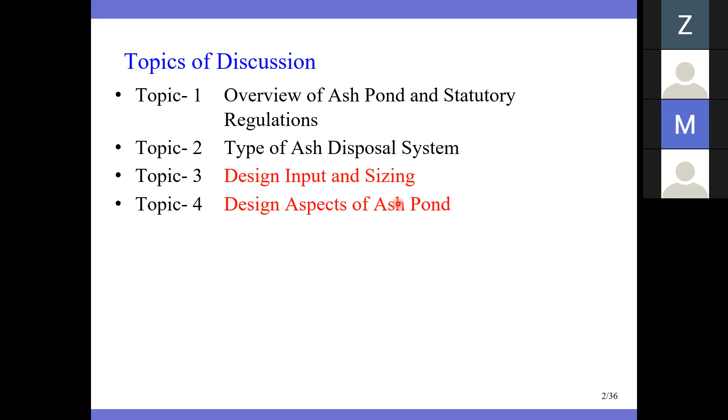Basically, a pond is an area where we store waste materials. Ash is mostly generated through power plants in India, and those power plants are mostly coal-based. The coal is utilized in the boiler for gaining heat by firing the coal. In turn, the coal is converted into ash, and that ash would be either consumed or utilized elsewhere, or put as waste material into the ash pond and stored. Whenever you need to utilize it later, you pick it from the ash pond and use it.

The storage capacity or area requirement is mostly governed by government norms for suitable capacity of the power plant, which we will be reviewing further. But the storage capacity depends on some key aspects, the major consideration being the capacity of the power plant—whether it's 250 megawatt, 500 megawatt, 660 megawatt, or 700 megawatt. So based on the power plant size, the storage capacity requirement changes.

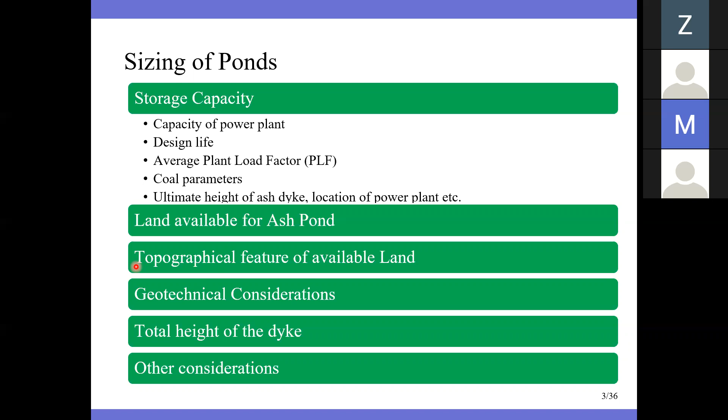We can say there are some particular methods to store the ash. One way is the upstream method, which means in stage one you will construct the first embankment, then you will dispose the ash and retain it within the containment made by the stage one dike.

Then in stage two, you will raise the second height of the dike on the deposited ash, and then raise it for the third height, but the raising would occur in an upstream fashion, so that your storage area would be reduced in each stage when you raise them.

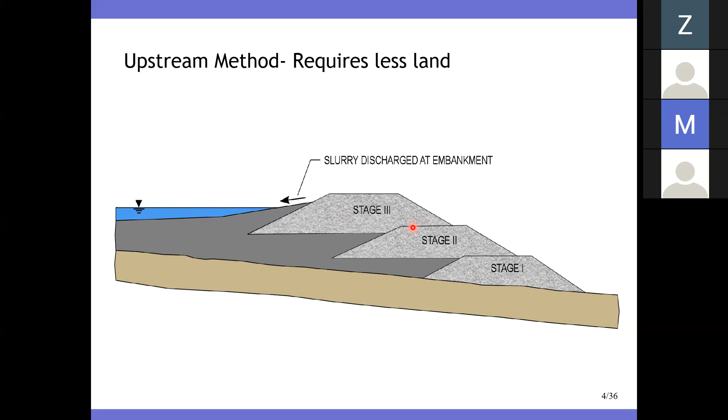The second method would be considered a downstream raising, where you have a stage 1 embankment, then you again construct the stage 2 embankment, then you store the ash, then you construct the stage 3 embankment, and then you store the ash.

As you progress further, you will be raising the dike outwards of the first stage embankment. This is very clear - if you are raising your ash ponds in downstream fashion, you will require a parcel of land outside the containment area, and much more land in each stage, because the footprint of your embankment is increasing.

The other method is center line raising, in which the dikes will be raised partly on the settled deposited ash, and partly on the downstream piece. But the center line of your embankment for each stage will remain the same. So we have three typical methods for raising the ash dike.

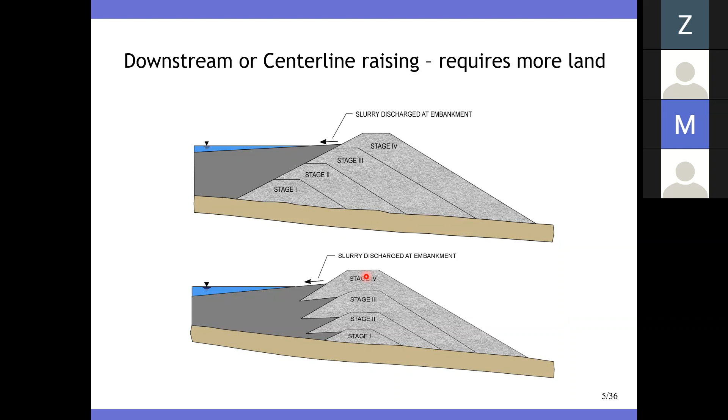Okay, now just to check - some favorable topographical features mean you have a particular valley type of feature, and if you construct an embankment over there, with a small length of embankment constructed, you will be utilizing more of the area for storing the ash.

As you say, this particular utilized area, if we divide by the length of the embankment required for containment, against the volume of ash that could be stored, we will be able to find out the efficiency - the efforts required for construction of the dike or embankment compared to the volume you will be able to store.

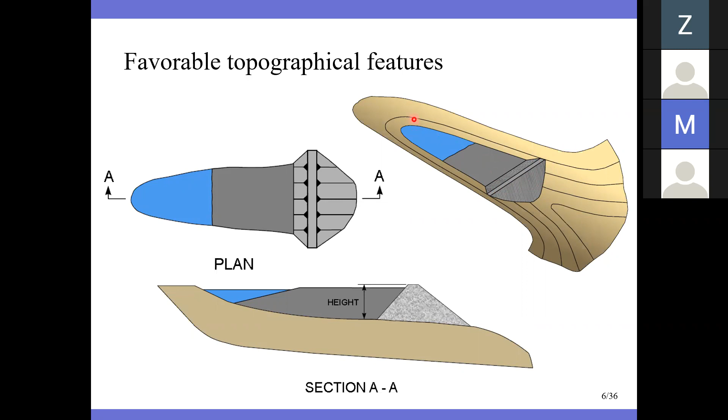Sometimes you do not have a favorable topography, or you have flat land or a given land where you probably would like to store your ash.

Here, to store the ash, the best way is to excavate a pit in the assigned area, and use the same amount of earth to raise the embankment on the periphery, such that the cut and fill volumes remain the same.

So you will not be required to dispose of any excavated material outside the plant, since whatever is excavated from the footprint of the ash pond is used to raise the embankments accordingly.

However, whenever you try to calculate, the excavation area is significantly lower compared to the volume required for raising the dike. In such a case, the first stage embankment height, called the starter dike, would depend on how much earth is available from the excavation of the ash pond.

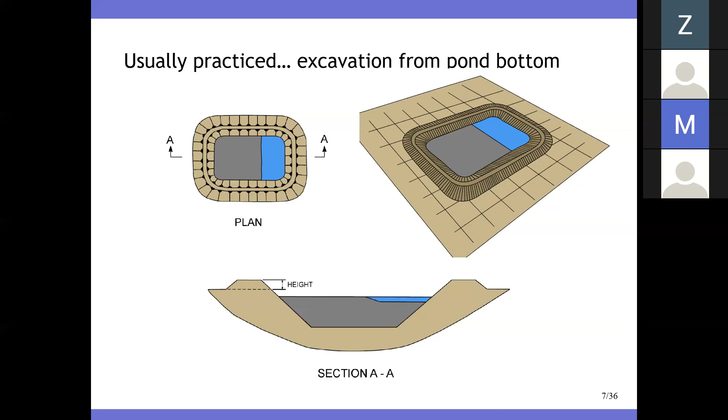Before we move on to the engineering aspects of ash ponds, let me give some information on what the actual problem is, and why it requires collaborative efforts from all engineering disciplines to solve.

We all know that electricity generation is mostly from thermal power plants in India specifically. Forget the approaches considered by developed countries; let us discuss specifically for our nation. In India, approximately 80% of electricity generation is by thermal power plants.

These thermal power plants use fossil fuel like coal in the boiler to fire their turbines and get heat, which requires a continuous feeding of coal. Since you burn the coal, everybody knows that after extracting all the heat, whatever remains is the ash.

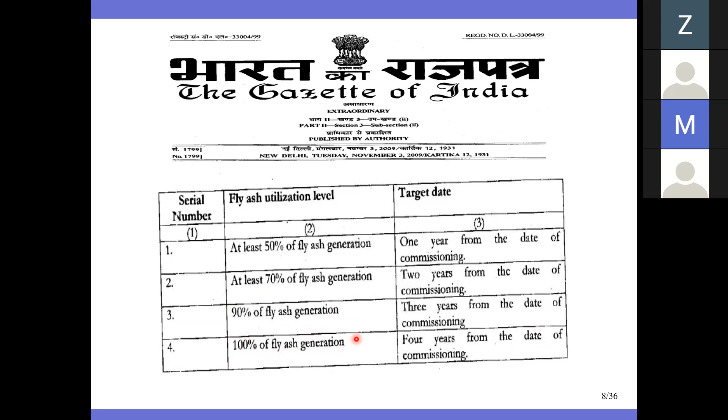Then, 2 years from the date of commissioning, 70% of the total ash generated shall be utilized. At 3 years from commissioning, you need to achieve 90% ash utilization. And from the 4th year onwards, 100% ash utilization is required for any power plant generator or operator.

Now, CEA, Central Electricity Authority, which is a government body from India, has some guidelines, some of which might have been changed time to time. This is somewhere around old, where I have picked it from 2007 version, that ash content in coal is 40% for 660 megawatt unit, 30% to 34% for 800 megawatt unit, based on Indian coal.

And 10% ash in imported coal. Now, as a nation, probably we are not that much blessed, because if we burn 1 kg of Indian coal and 1 kg of imported coal, the ash generation in Indian coal would be considerably higher than you get with imported coal. So the preferred choice for any power plant developer or operator is to import coal if it is viable and feasible within their plant operation metrics, because importing coal is not a small thing. You probably need to spend much more compared to getting coal from Indian coal blocks.

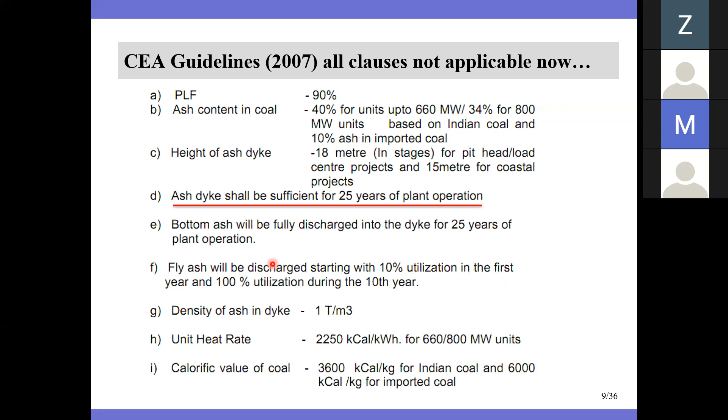Then there is generation of bottom ash and fly ash - not going into that. These are the guidelines from CEA, which would be used to derive how much area we will require to store the ash. We have some calculations also.

This is as per CEA 2010 guidelines, that if you have a 2 into 500 megawatt configuration for a power plant, and if your coal is Indian coal, then land required or recommended is 500 acres prior to 2010, and now it has been reduced to 250 acres for this configuration.

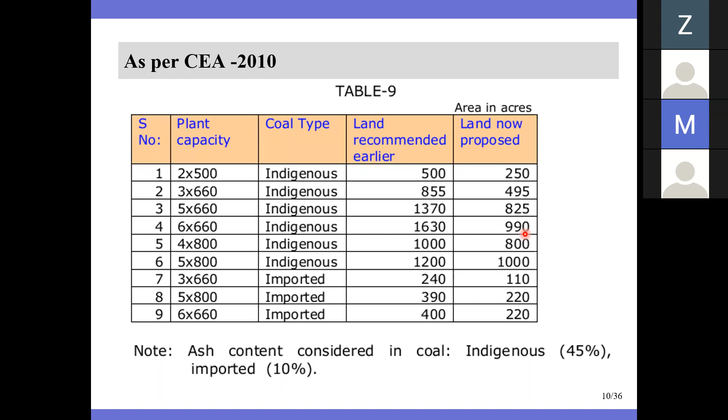But once you store it, I have never seen any ash pond which can be emptied later on. So definitely the storage is permanent.

Let's take a classical example. I just want to emphasize how much volume is generated every day, and for that volume you need to make a provision to store it into the ash pond.

So let's say if we have a 700 megawatt plant, or something like 732 has been considered, then coal consumption is approximately 376 tons per hour for this configuration, and in another case this would be 411 tons per hour.

And correspondingly, if the ash content in the coal is 33%, and in this particular option it is 34%, the plant load factor is 90%, and the density of the ash in the pond is 1 ton per cubic meter. Now, if you see normally our soil, the ground density is somewhere around the range of 1.6 to 1.8 tons per cubic meter, and here it is 1 ton per cubic meter.

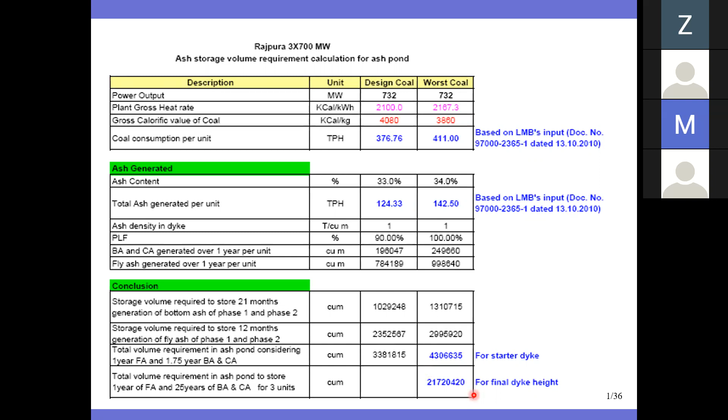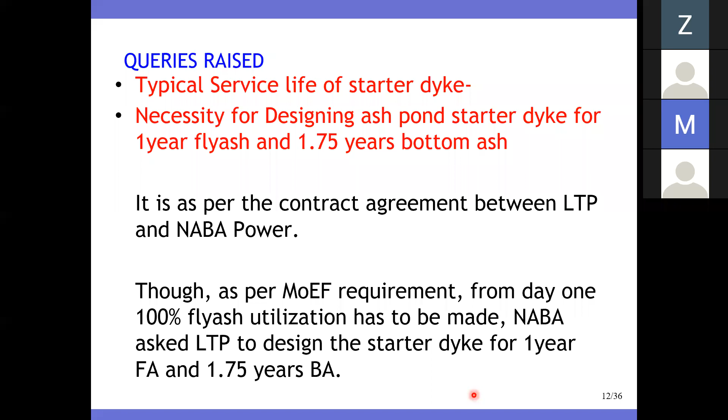So the problem is very worse, and probably one of the biggest challenges for almost all thermal power plants, and not only thermal power plants, but for our ministry or nation, is to utilize this much amount of ash generated every hour. If you sum up all the thermal power plants running simultaneously in India, per hour we will be generating a huge amount of ash which we cannot utilize, and that unutilized ash would require more and more storage area every day. We are responsible for this because we are mainly dependent upon coal-based thermal power plants.

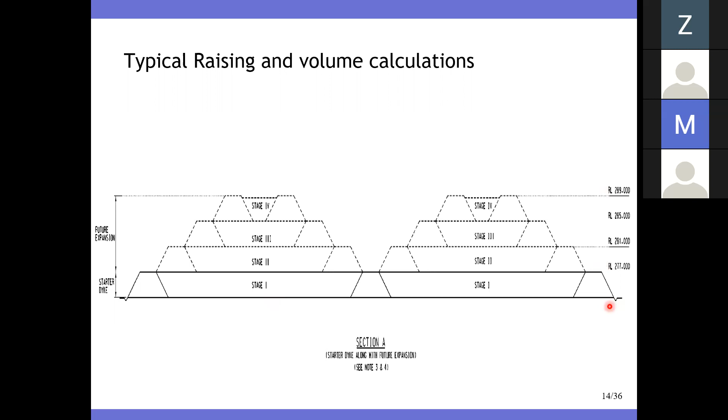Now let's come to the construction of the starter dyke. The starter dyke means the stage 1 embankment, mainly constructed using excavated earth, whereas all subsequent raisings are generally constructed using ash as an inert material inside, with an earth cover all around the embankment. So this would be a mixture, or blending, of ash and soil, so that you utilize some of the ash even in the construction of the embankment.

However, whenever you do that, it brings more challenges for the designer and for the contractor also.

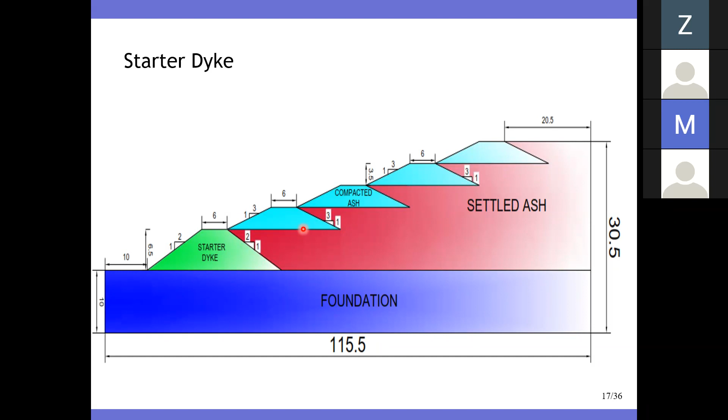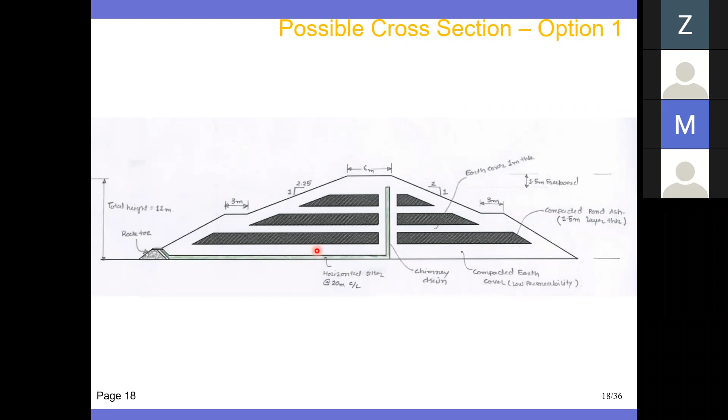This shows some configurations of how the area within the embankment can be utilized with ash consumption. This is my entire embankment, and I have used a zoned embankment in which the darker area can be filled with ash, with earth all around, and inside the earth you will have some ash zones, so that within the embankment, without compromising slope stability, you will be utilizing some percentage of ash.

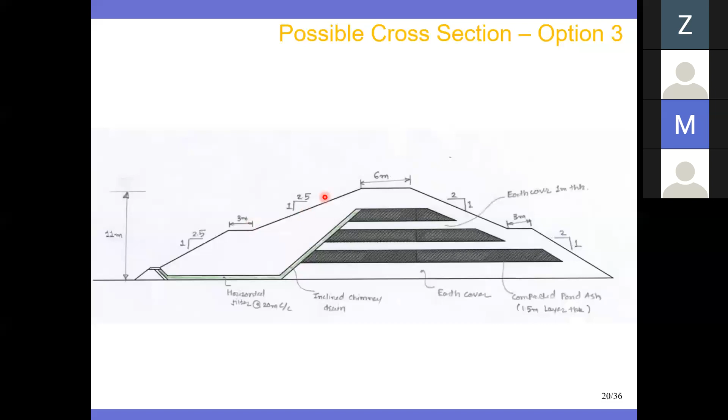This is a typical section already designed in one of the projects we handled, involving ash storage area development and the raising of ash embankments.

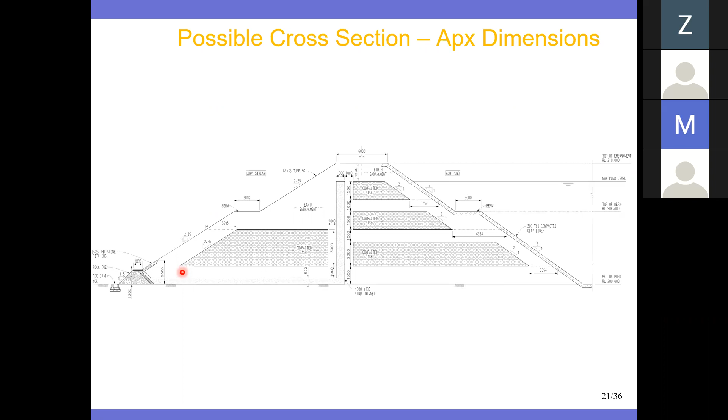Let's talk about raising. If somebody says to construct an embankment 20 meters high in a straight go, you would require a huge amount of earth, and the construction would take a very long time to raise that 20-meter embankment in one go. So the major approach is to go stage by stage: stage 1, stage 2, and then you raise the embankment or dike so that it will be raised and you will have more storage area.

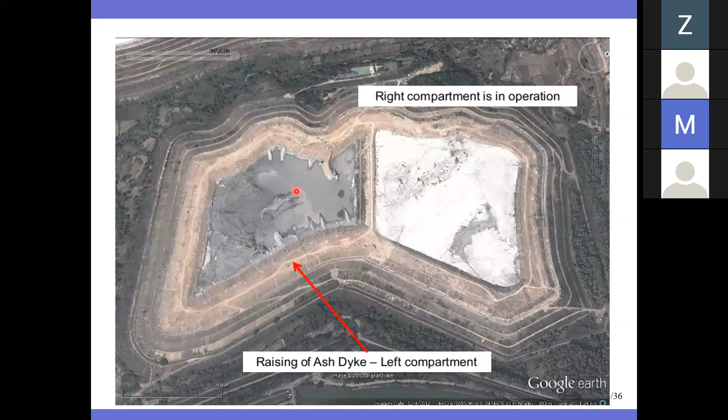If you go back, there was no raising on this one initially. It was initiated because this ash pond was about to fill, so to raise it, they raised this embankment height and started discharging or disposing the slurry into this compartment until that compartment is ready for another raising. That is how the embankment has been raised.

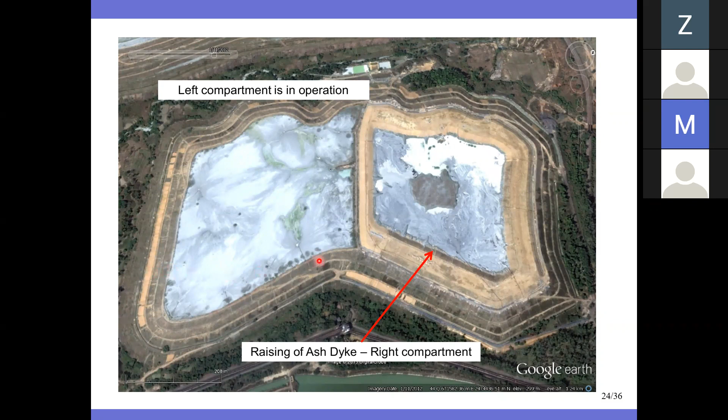Now if you see all this, the ash dike has increased through raising. So this would be the starter dike, then there will be a first raising, this would be a second raising, then a third raising, and so on. Based on your final required height, you will decide how many raisings you will need.

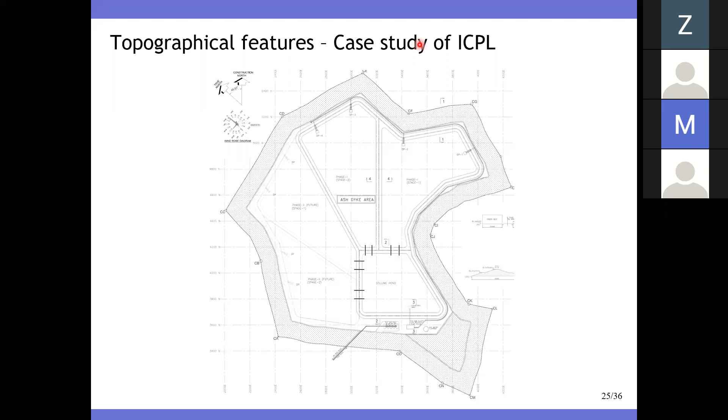As we said, the natural contour is in this direction, so the higher level is on the north side, but the lower lying area is on this side. You use this natural terrain and construct an embankment so that you discharge slurry from this point. The ash will be deposited into this area, but the water will travel to the natural course of the land and accumulate here. Collect it into a settling pond, and from this settling pond, you pump it back to your power plant. So this would be a topography favoring your ash pond construction.

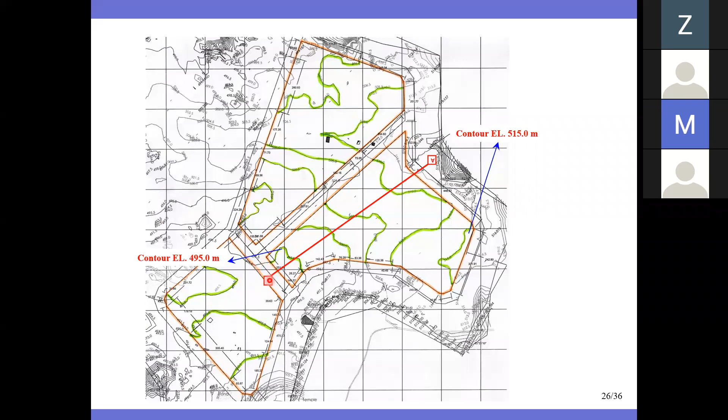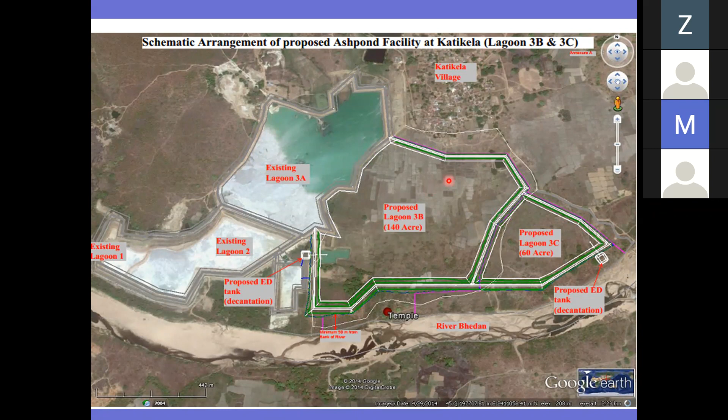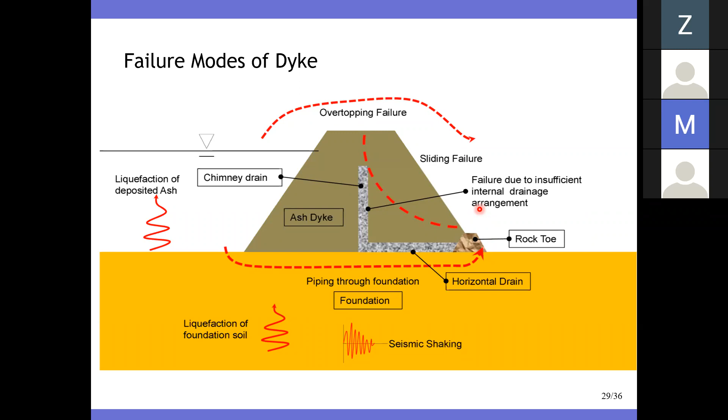So mostly for this matter, the criteria for safe design is in this particular form. You can summarize them: material properties for deciding the type of dyke and method of construction require information on the foundation and on the fill material from which you will be raising your embankment. For no overtopping, you need an adequate freeboard, and as per IS 10635, you need to provide a minimum 1.5 meter freeboard. Then foundation stability requires that shear stresses, or exit gradients, stay within limits, and your slope stability must be more than what is specified by the Indian standard.

And for that matter, if I look at the stability analysis, in the static case my factor of safety is supposed to be more than 1.5, and for the dynamic case, it is just more than or equal to 1, as per IS 7894.

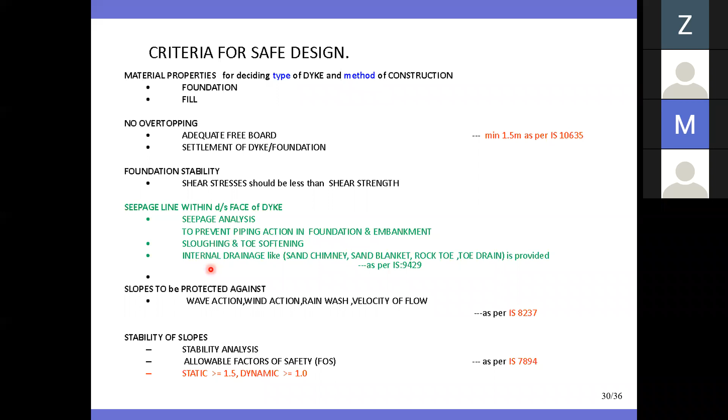IS 9429 covers internal drainage for embankments, and you need to arrest piping. The internal drainage for your embankment needs to be perfectly positioned to reduce the pore water within the embankment, because as you raise the height of the dyke, the pore water pressure will increase.

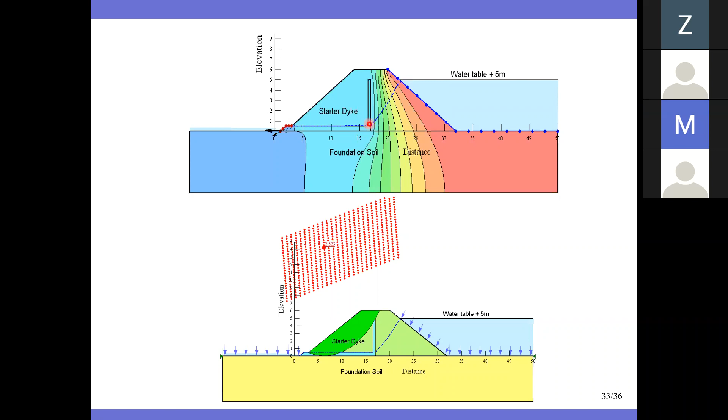Otherwise, for a more conservative design, a chimney drain is also constructed, so that if any choking occurs in the horizontal filter, the internal drainage is sufficient to take care of your needs. But this was for the first embankment.

But we need to check the individual slope stability, and we also need to check the global slope stability. Global means I will not check the slope stability of individual embankments, but rather determine how a global factor of safety or global slip surface would occur.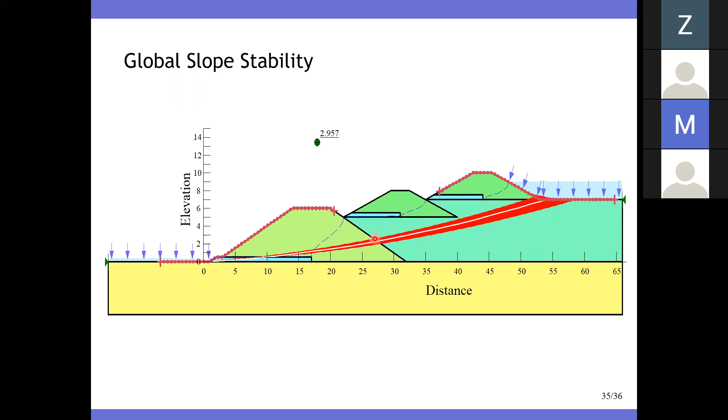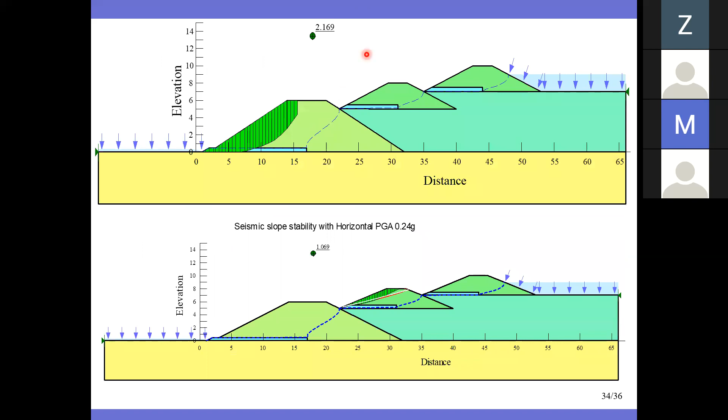You see the slip circle area for the individual cases and for the global cases are different, whereas the global slope stability is 2.9, and the static slope stability for the starter dike is 2.1 something.

This is also true when you have multiple raisings and you have utilized typical earth available around the ash pond for construction of dikes. It may not be possible to get very low permeability soil available all the time for the starter dike. If somebody insists on very low permeability soil, meaning clay, for construction of the starter dike, that is also not perfectly okay. You need a good matrix between the shear strength, some phi, some C, and a mixed type of subsoil conditions which can offer more shear strength compared to cohesive soil type.

So we are checking the individual slope stability for each raising. Sometimes they may have similar values, sometimes based on the loading or the slope you select for the raised dike, it would differ. The slope means 1:2, 1:3, or whatever - the moment you increase to 1:3, 4, or something, the raised embankments become much flatter and much more stable. But in that case, you lose some ash storage, because flattening the raising would result in lower storage volume of ash, and no developer would consider this feasible, because the area allocated for the ash pond is the same, and you want to utilize more area and store more volume within the same area. That is only possible if you raise the embankment in a steeper way, so you get more volume.

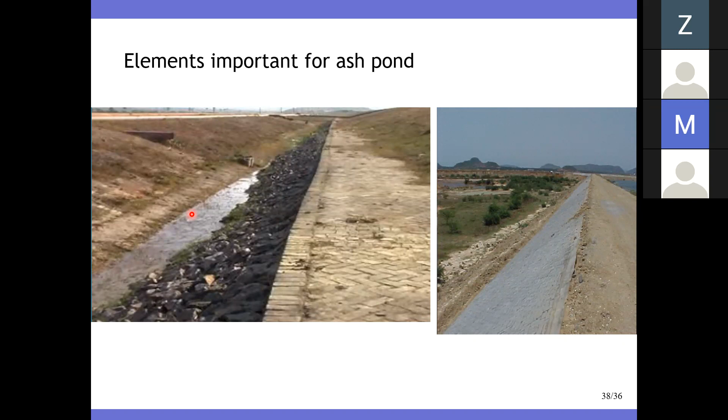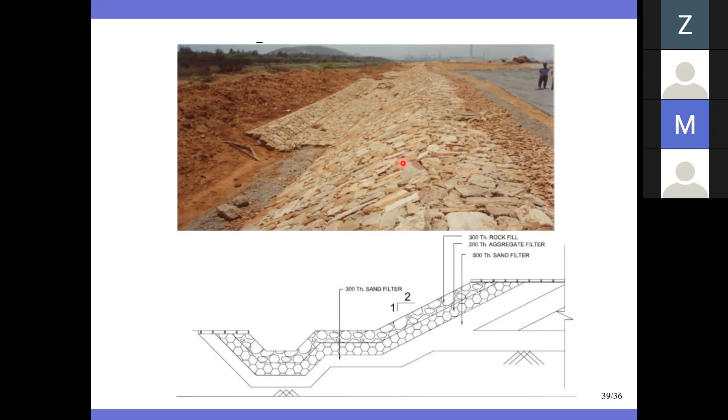This is another design of rock toe, where the drain and the rock toe are connected, or designed in such a way that you do not require a separate drain. In such a case, you require a huge amount of rock, with big pieces of rock toe placed so that the slope stability arrangement as well as the drainage arrangement for a channel is formed, able to sufficiently convey the seeped water into further low-lying areas.

Someone may ask how you construct your chimney drain, since it is a very thin section within an embankment. I would like to highlight that first the embankment is constructed, and then you need to excavate the trench, and within the trench dump loose soil or loose sand with high permeability, which acts as a water conveying channel. This chimney drain is constructed on the embankment at a second level - again you excavate the trench and fill with sand. As you go on raising the embankment, this chimney becomes a through-connected barrier from top to bottom.

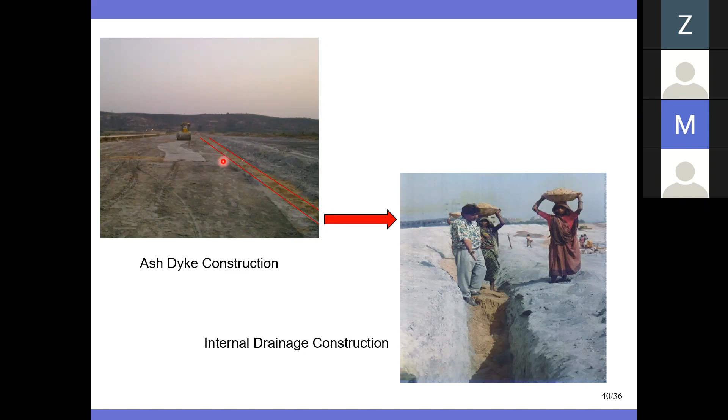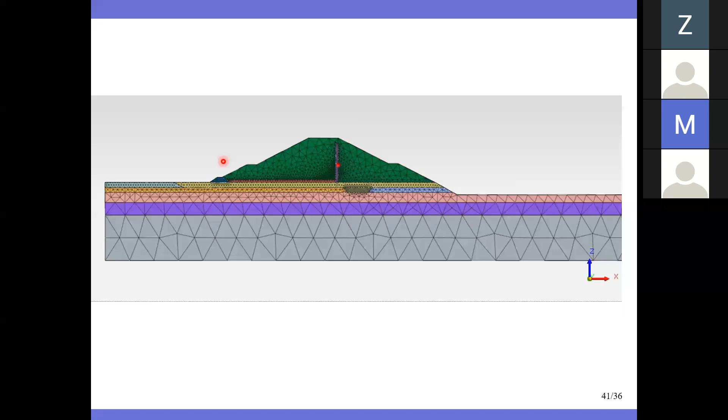Someone may ask why we need a continuous blanket type horizontal filter, since sand is a costly element - can we instead have intermittent horizontal drains, maybe in the form of pipes or trenches cut along the embankments? I'll explain with a 3D analysis. You see, this is the chimney drain, and these are the drains which have been connected with the main rock toe over here.

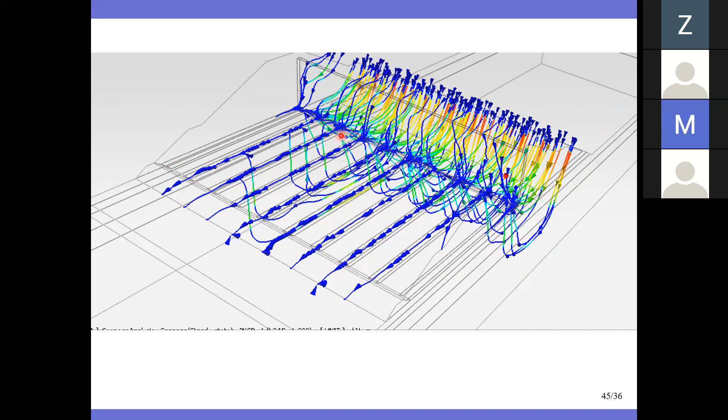Conventionally, one particular layer of filter drainage is provided for the entire area, but that would be very cost consuming, because clean sand of that much quantity would be very costly for a project. Technically, if you try to address that at an intermediate level, you have a drainage path connecting from chimney drain to your rock toe. So this is your chimney drain, and this is your trench connecting from rock toe to your chimney drain, with normal earth areas elsewhere, so you will not be using the entire area for filter drain material.

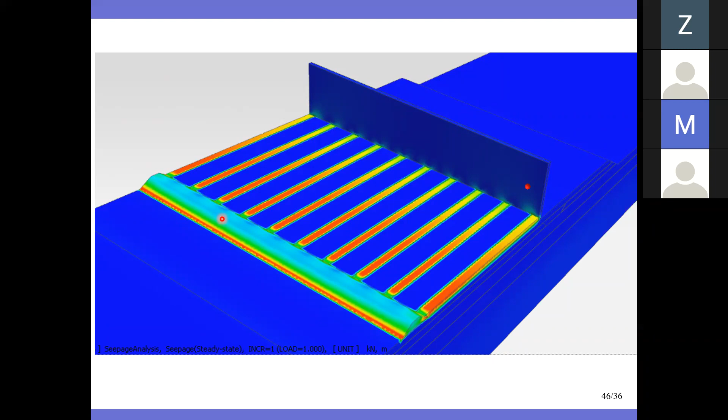A 3D seepage analysis can be performed to find the best suitable spacing between these drainage channels or drainage areas, and that way you will optimize your ash embankments.

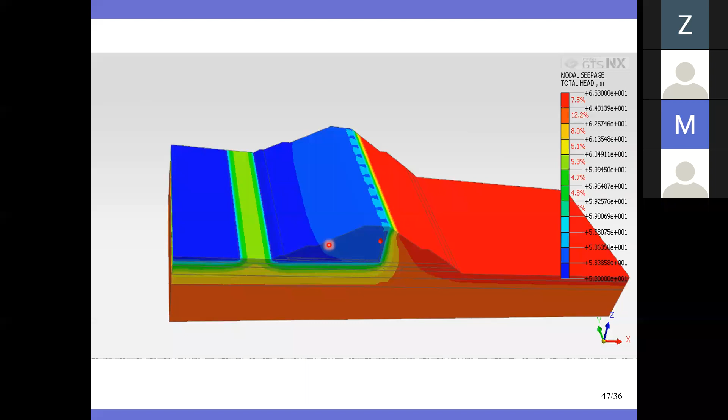But the crux is your downstream face is supposed to remain dry, and the slope stability of the downstream face should not have any problem, because any slope stability failure would lead to failure of your embankment.

So basically, though you will be discharging the slurry, you need to design your ash pond as a water retaining embankment, just like a reservoir or embankment for a dam or storage of water, because you will never know on which face of the ash pond ponding of water would occur, unless you have very specific operational control where you discharge ash from one point and all the ponded water is diverted to locations with specifically designed embankments.

But when they dry, they become like a white powder, or a very low weight material. And if the wind blows, fuming will take place and these ashes will be transported, or you will experience this around that area.

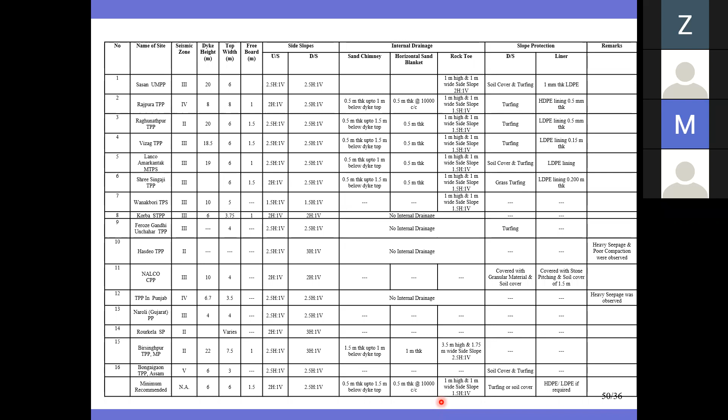It all depends on your slope stability calculations and considerations. You may use different configurations and calculations, but try using conservative configurations, and for more, refer to some key Indian standards.

So I will be listing some standard references which are mainly used for the design of ash dikes and ash ponds, related to embankment dams and internal drainage arrangements, slope stability requirements, freeboard, and design of under-seepage controls.

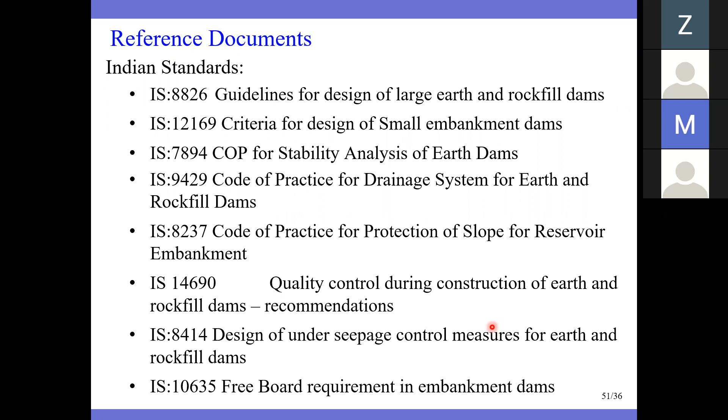These can be used, or you can refer them for better understanding of slope stability requirements and procedures and guidelines. Other reference documents are the standard design criteria for balance of plant, thermal power plant, available online.

If you search for guidelines for balance of plant design and thermal power plant design, it will be available. But one key document, which National NTPC or National Thermal Power Corporation has made, is the guidelines for design of dikes in ash disposal area.

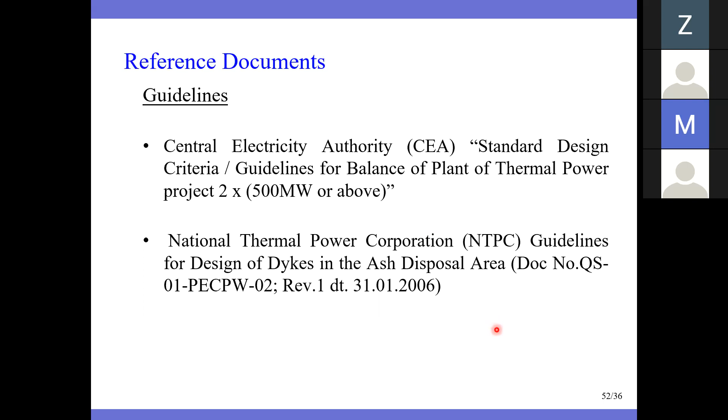This is not publicly available, so if you have any known friends in the design department of NTPC, you may get a copy of it. It is a very old document, but you will find very valuable information in it.

So we talked about the proportion of the area, the design, typical configurations, considerations of slope stability and internal drainage requirements, but still you need to learn a lot from the failure of embankments, specifically for ash dikes, because when you try to store ashes in one particular area and it is breached...

...probably all agricultural land or urban land around that area would be permanently contaminated with the ash, and removal of ash from the land probably would not be possible. That is why breaching of an ash dike is a very serious concern.

In some cases, it has resulted in the stoppage of the power plant in that area, and it depends on the environmental strength of that particular state or pollution control board.

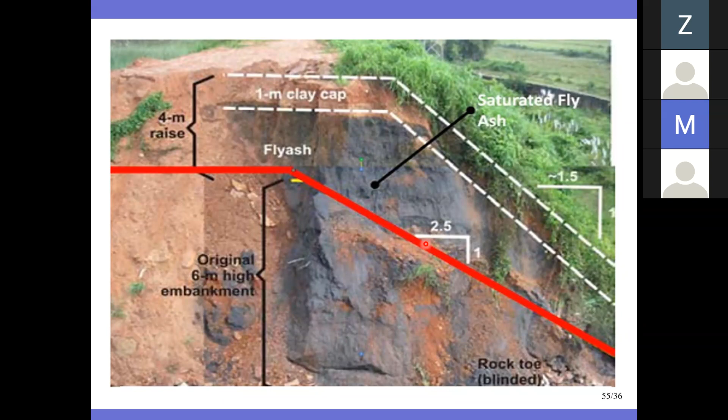Sometimes contractors do some mischief, or there are specifications where the raised dike can also be constructed using ash. But if you do not use them properly, there will be an issue. In this case, the central core of the embankment is supposed to be soil, with some particular fly ash areas, but actually the contractor might have dumped all the ash inside and covered the embankment with a nominal thickness of earth. So you will not be able to see or visualize what has been lying inside the embankment. But when failure occurs, you understand that the entire thing has gotten washed away in and around the area.

Sometimes you find the soft toe, as we have discussed: if the phreatic line is emerging out or touching the downstream face of this ash slope, you will find that softness, or soft downstream toe, has occurred, and then ash will be emerging from that embankment, which leads to progressive failure of the ash pond.

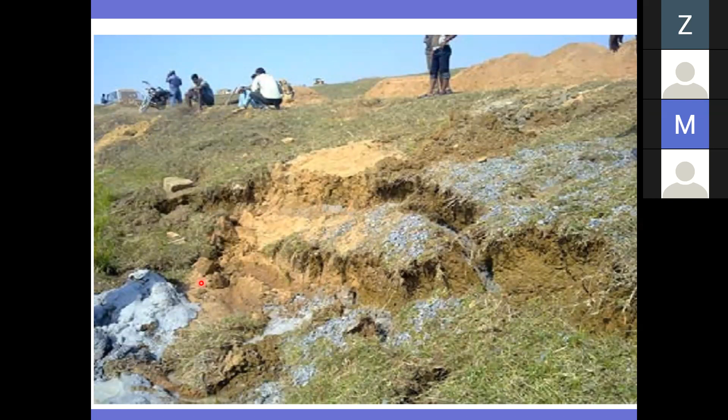This was a breach of the freeboard. The minimum freeboard requirement is 1.5 meter. Now you see this is the top of the dike, and ash has already been filled up to this. If you try to fill more, this ash will start overtopping the embankment, leading to progressive collapse.

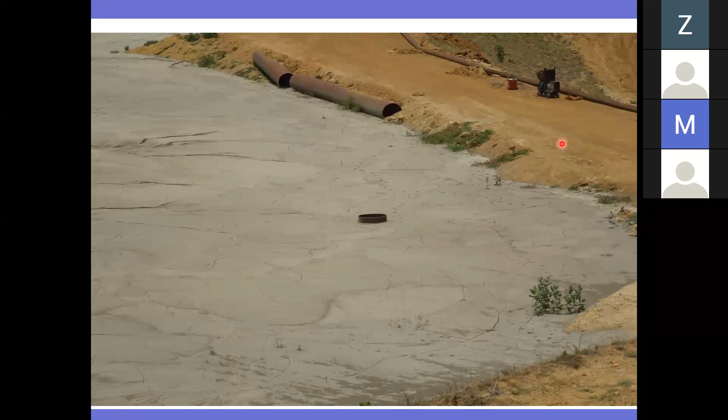You can see another problem here: rain cuts, where you do not have a proper earth cover on the embankment which has been constructed using ash. If you see, the earth cover at the top is this much thick, but that much thickness of earth cover is not there on the sides. So subsequently, in 2 or 3 storms, this entire thing will be eroded into the rain cut. You can see it has started rain cuts in this area and around.

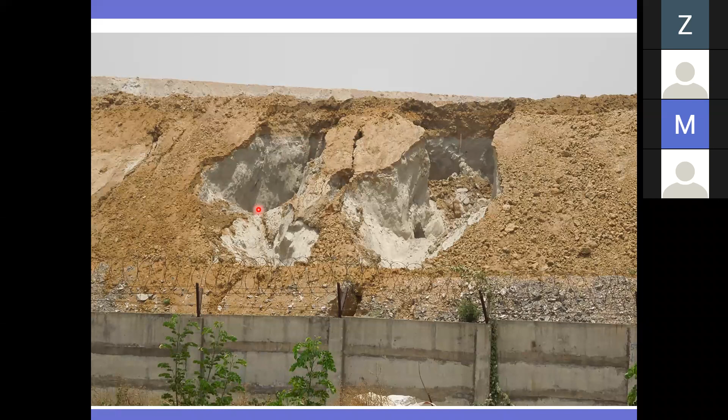Here you see there are plenty of progressive rain cuts. And if you do not address this kind of rain cut with immediate backfilling, this would lead to further collapse, or breach of the main embankment, and your ash slurry will get spread in and around the ash pond.

This is a closer photograph. If you see, this is the main dike up to this height. This is the raised height, and this is again a raised height. But if you see the raised height, you hardly see any earth cover, or even if earth cover had been provided, it might have slid down because of the steep slope of the raised height. The same thing has happened here: the ash, or the embankment, has slid down to this area, indicating there are issues with the slope of this dike.

I think we have some time. I would like to cover a few more aspects of seismic slope stability of these ash dike embankments. Yes sir, please continue, we have enough time.

This was one case where we have an ash dike which needed to be raised, but when we checked it for seismic slope stability considerations, it did not fit into what had already been provided, and this ash embankment required more strengthening measures to make it stable considering seismic slope stability.

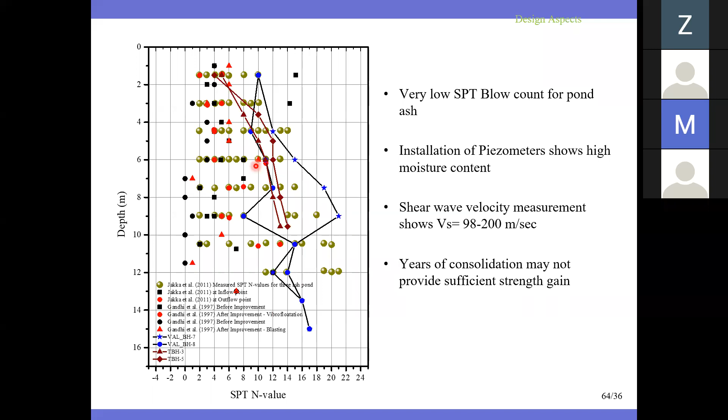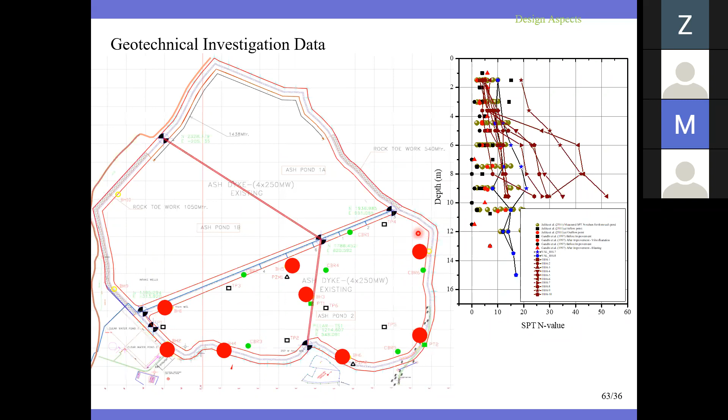If someone considers the liquefaction potential, probably you have an entire foundation which can have a very high liquefaction potential, and it will not be possible to support the embankment directly placed on this ash pond. The problem was not to place the embankment exactly onto the embankment footprint, but if you place a raised dike on deposited ash, and if that is not stable, then your entire raised dike is not stable.

And that way, some investigations were carried out. This was the geometry which was checked. The existing condition was that only the starter dike has been placed. All other subsequent raising is to be made, but the study was made to check whether the slope stability coming from two softwares is in agreement, and what was the seismic slope stability for such kind of a raised dike, considering that the ash is of very low shear strength.

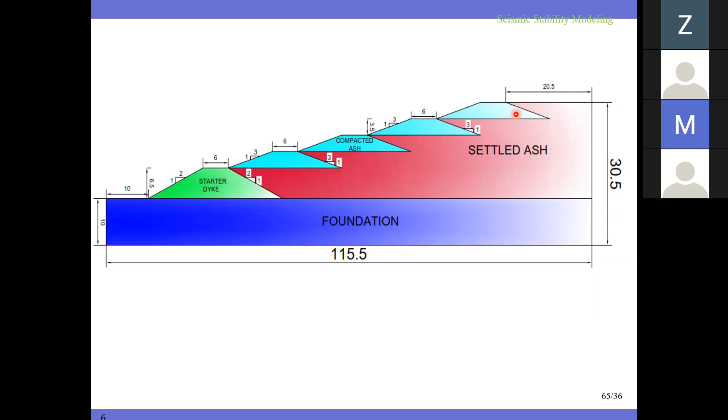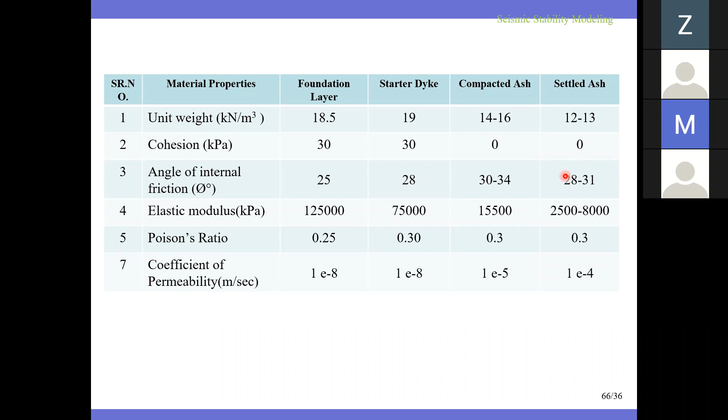This was the property which has been considered for the foundation layer, starter dike, compacted ash, and settled ash. If you see the angle of internal friction, the settled ash we have been checking for 28 to 31. So this was the range of values for which the embankment would be used, with the Poisson's ratio and permeability as shown in the table.

The problem was first modeled in FLAC, and the results show that there is a global factor of safety, or global instability induced, and I would say the starter dike would remain intact, and at the same time your foundation is also strong enough, so whatever failure is supposed to be induced would be within the deposited ash only.

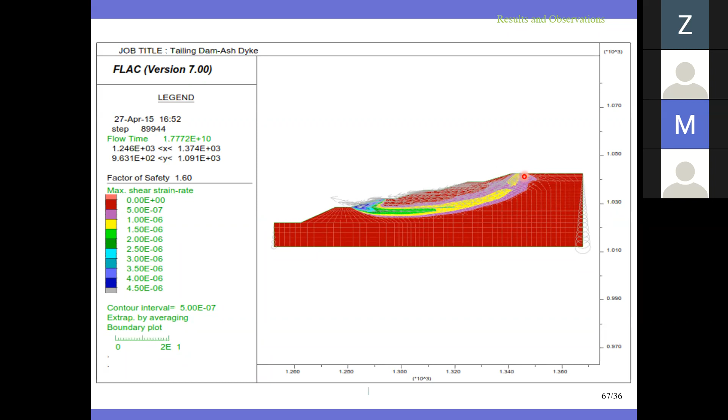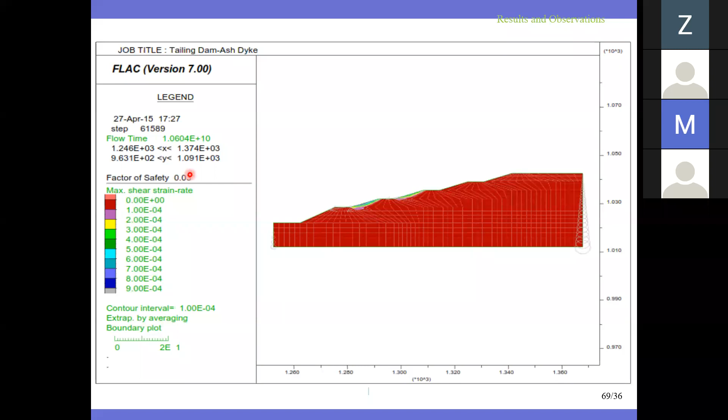And if I check the individual slope stability, probably those are the veneer stability of the raised dyke surfaces. And if you see, the factor of safety is very low, and the corresponding factor of safety is approximately 1.6 for the global case.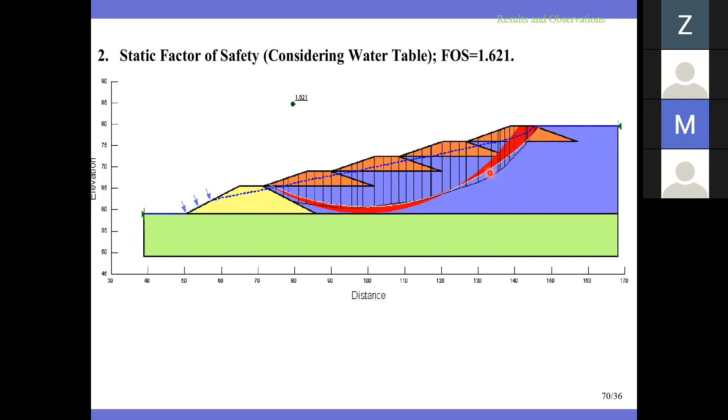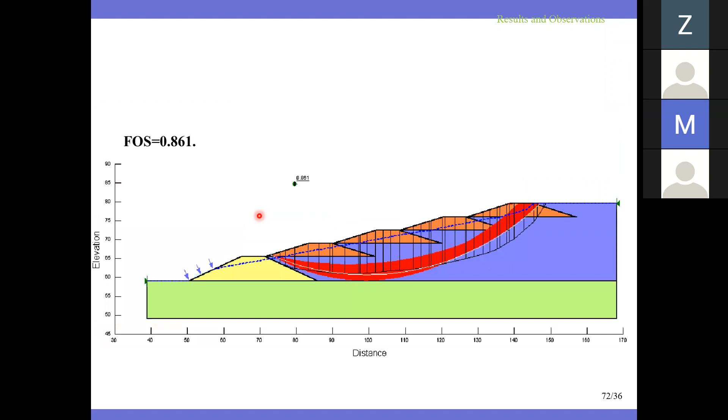The same problem was modeled using GeoStudio also, and then we tried to compare both of them, the dry conditions and wet conditions, the results of FLAC and GeoStudio were compared. But if you see the pseudostatic is for zone 3, up till now it's okay. For seismic zone 2, this is also still okay, but the moment you enter into zone 3 or zone 4 or zone 5 category ash ponds with embankment configurations like this...

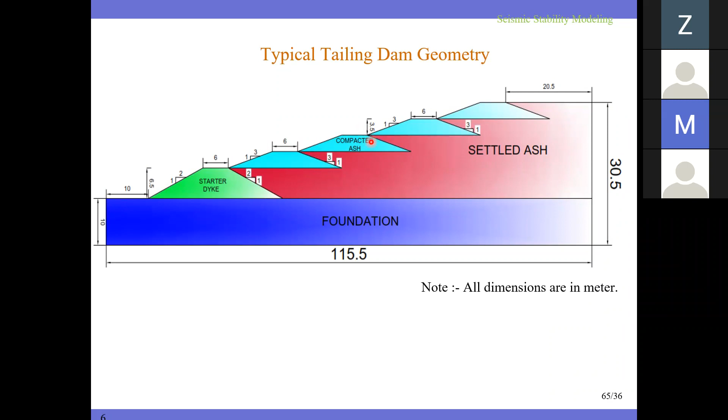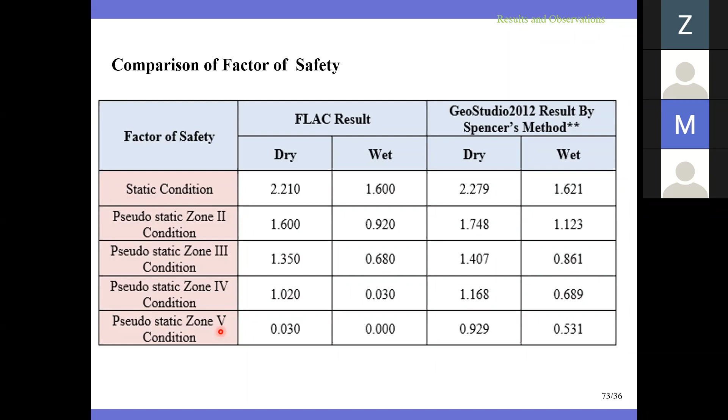...where you have a 1:3 slope along with 6 meters of embankment width for the raised dike constructed with compacted ash properties, it won't be sufficient or suitable for your seismic zones 3 and onwards. So you need to be very careful. This was one particular study with typical configurations to check whether they qualify for higher seismic class sites, or whether we need to limit them only to pseudostatic zone 2 or zone 3 type of embankment.

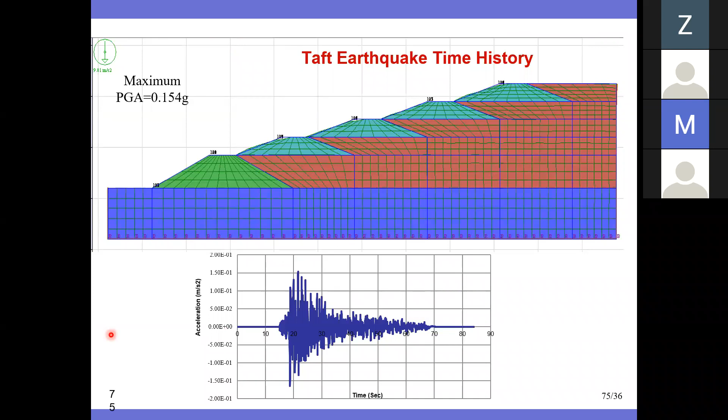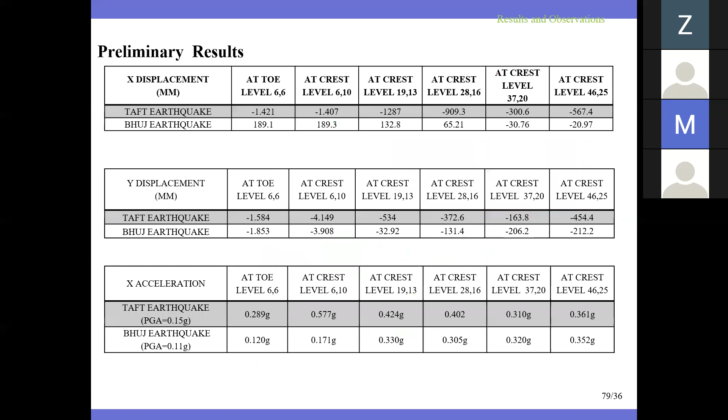Then time history analysis was also carried out by applying the bedrock motion at a base level, or an equivalent base level considered, using the Taft earthquake and Bhuj earthquake. And then the displacements of the embankment were checked, and these are some readings for some particular observations.

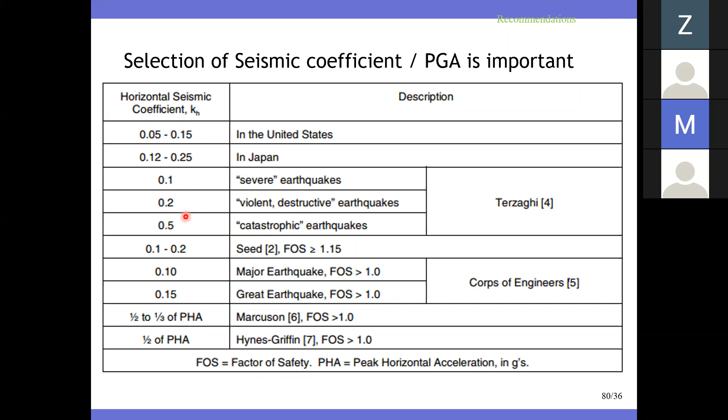Corps of Engineers and some other references, these are already available on the net.

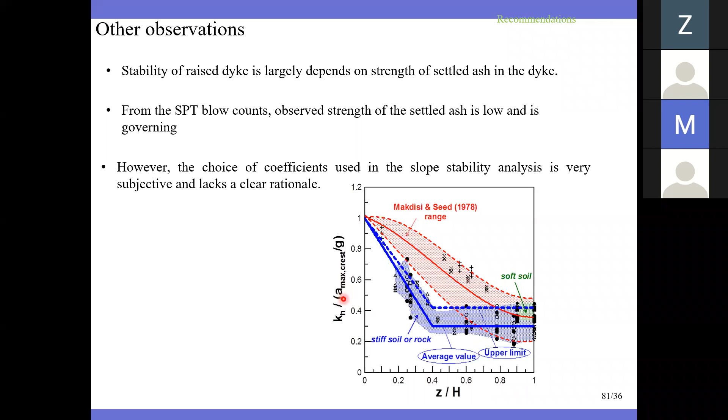Stability of a raised dike also depends on Z by H, that is the height of the unstable wedge versus the height of the entire dike, versus KH, the seismic coefficient or inertial coefficient for that particular wedge, which needs to be considered. So you need to be very careful in selecting the PGA for natural ground.

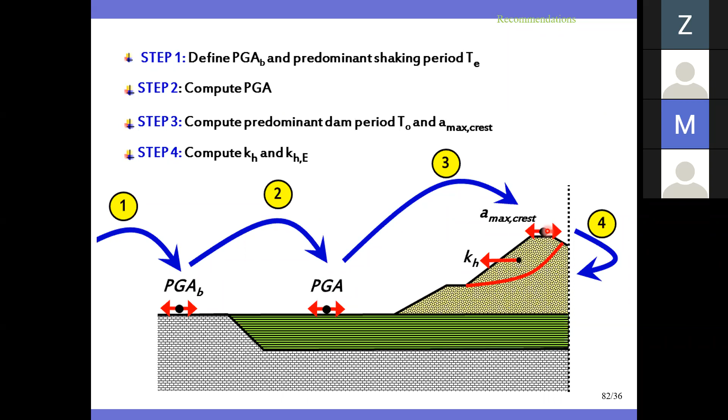If you have a filled up ground, or some deposition has already occurred, then the PGA at the top of the embankment and this information becomes very important if you try to do seismic slope stability of such a starter dike or raised dike, where embankments are not directly resting on natural earth, but on deposited ash type material. The behavior of that in a seismic event is very complex and not well ascertained, so you need to be very careful.

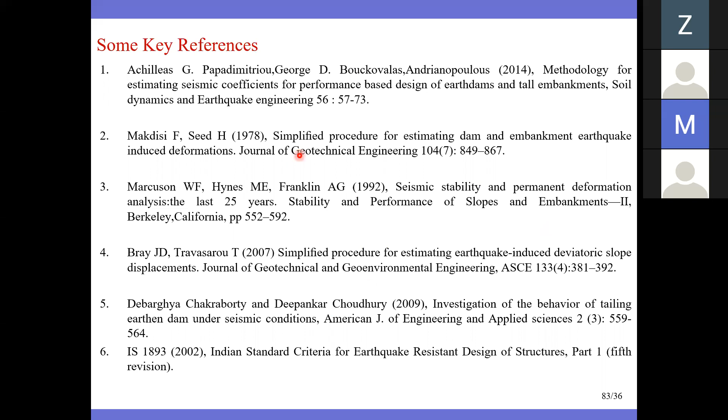Some other key aspects or references, those who are more interested in seismic slope stability can refer to them. You can also use Makdisi-Seed, the classical paper. And that's it, thanks for listening to me.